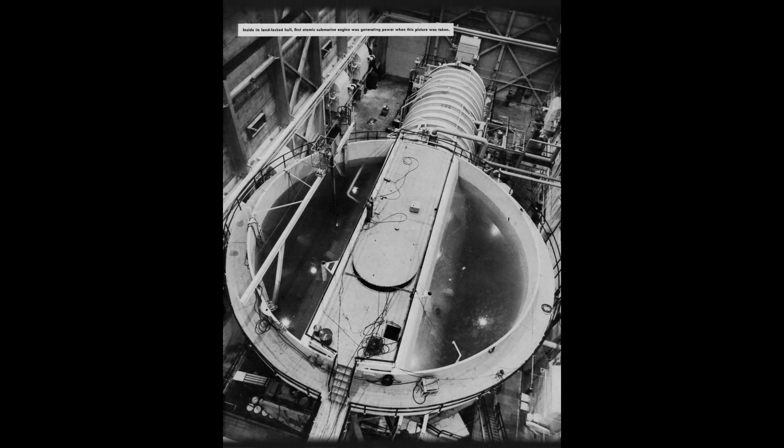The 1950s and early 60s were a time of supreme technological faith. The United States had unlocked the power of the atom. We were building rockets to go to the moon. We were curing diseases. There was a pervasive belief that American engineering could conquer any obstacle, whether it was the vacuum of space or the crushing pressure of the deep.

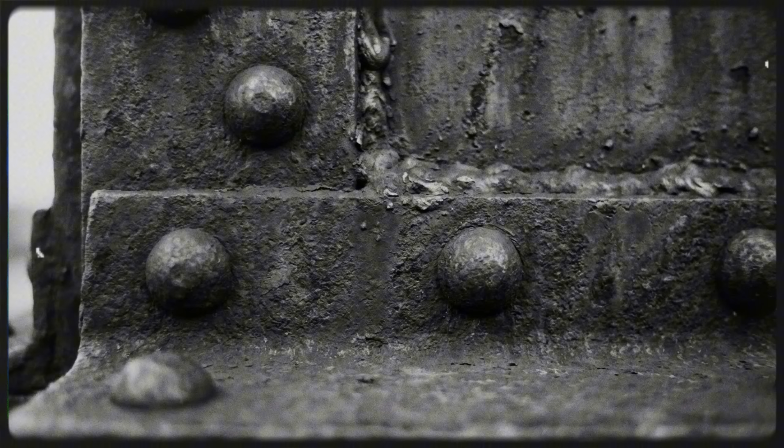In 1954, the Navy launched the USS Nautilus, the world's first nuclear-powered submarine. Before Nautilus, submarines were essentially surface ships that could dip underwater for brief periods. They ran on diesel engines and had to surface to recharge their batteries. They were tethered to the air. Nuclear power cut that tether. A nuclear reactor needs no air to operate. A piece of uranium the size of a golf ball could drive a submarine around the world 3 times without stopping. It changed the fundamental nature of naval warfare.

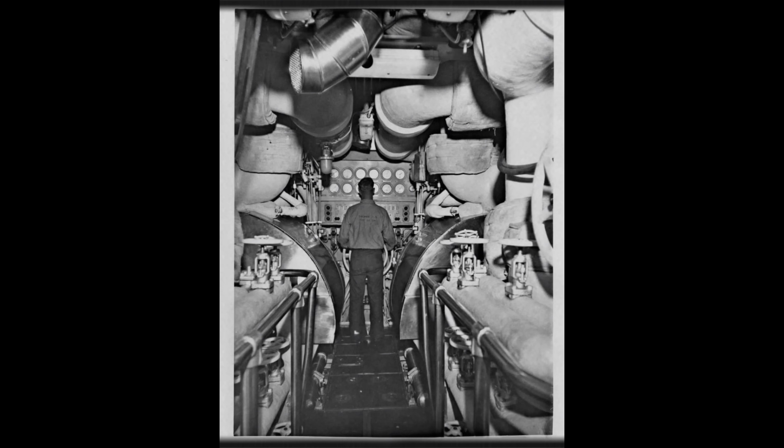Suddenly, the submarine was a true creature of the deep, capable of staying submerged for months. The Navy, led by the brilliant and demanding Admiral Hyman G. Rickover, embraced this new power with religious fervor. They built a fleet of nuclear attack submarines designed to hunt Soviet vessels and protect American carrier groups. The Thresher was the pinnacle of this evolution. She was the first of a new class, designed not just to be fast, but to be quiet and deep.

The engineers gave her a hull made of HY80 steel. This was a new alloy, high-yield 80, capable of withstanding 80,000 pounds of pressure per square inch. It was tough, flexible, and incredibly strong. It allowed the Thresher to operate at depths that would have crushed World War II submarines like tin cans. Her test depth was officially classified, but it was known to be in excess of 1,000 feet. She was powered by the S5W reactor, a pressurized water reactor that was a marvel of reliability and density. It provided massive amounts of power in a compact space, driving the ship through the water with silent, deadly efficiency.

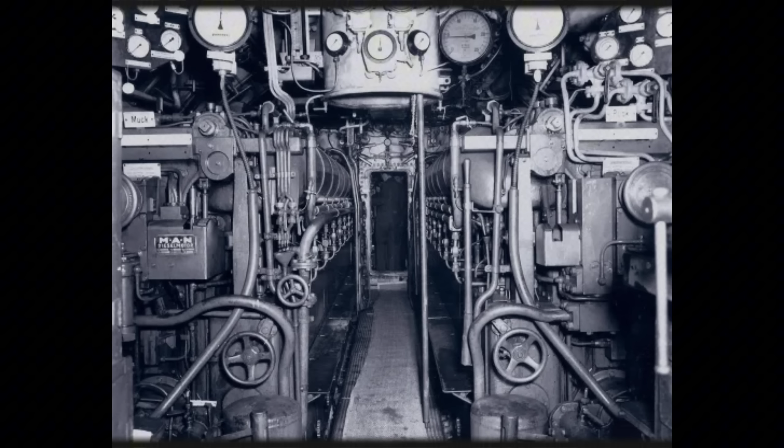The men who designed and built the Thresher believed in her. They believed in the math. They believed in the welding. They believed that they had mastered the physics of the ocean. 'We believed we had built a submarine that could not sink,' a senior naval architect would later testify before a congressional inquiry. This was not arrogance in the traditional sense. It was the confidence of a generation that had won a world war and was busy inventing the future.

The Thresher was more than a machine. She was a statement. She carried the most advanced sonar suite in the world. She carried the newest weapons. She was the Cadillac of the submarine force, the assignment every officer wanted. To be chosen for the Thresher crew meant you were the elite.

When she left the Portsmouth Naval Shipyard for her sea trials that April, there was no fear. The sea trials were seen as a validation, a final check mark on a project that was already considered a triumph. The idea that the hull could fail, or that the reactor could stop, was considered a statistical impossibility. The systems had backups. The backups had backups. The engineering was robust. But faith is a dangerous thing in engineering if it is not paired with verification.

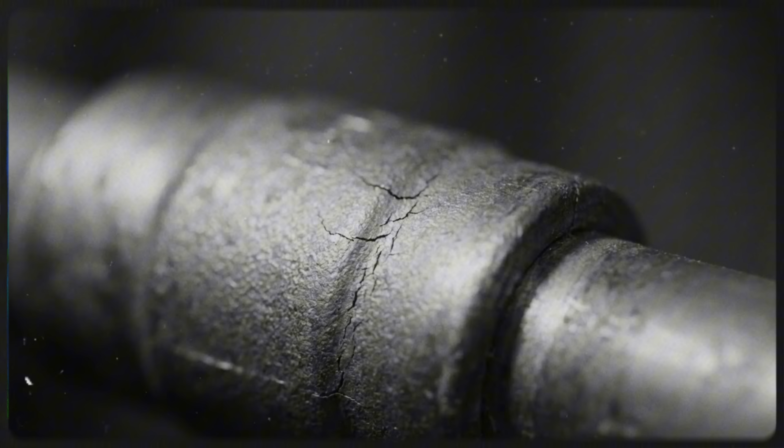The confidence in the Thresher's design masked a series of subtle, quiet dangers. The shift to nuclear power had happened fast, perhaps too fast. The technology of the reactor was light years ahead of the plumbing that supported it.

While the nuclear heart of the ship was built to the most exacting standards imaginable, the rest of the boat, the saltwater pipes, the hydraulic lines, the ballast systems, was built using older, more traditional shipbuilding techniques. It was a spaceship wrapped in the skin of a steamer. Experts and historians who study this era, such as Norman Polmar, often point out this disconnect.

We had placed a 21st century power plant inside a hull built with assumptions from the 1940s. We assumed that because the steel was stronger, the ship was safer. We assumed that because the reactor was perfect, the ship was invincible. As the Thresher pointed her nose down and began her descent into the cold, dark Atlantic, she was carrying more than just her crew.

She was carrying the collective hubris of a nation that thought it had solved the problem of survival at sea. The ocean, however, does not care about national optimism. It does not care about advanced degrees or high-yield steel. It cares only about pressure.

The men on board felt the floor tilt as the submarine dove. They felt the air pressure in the boat change slightly. They watched the depth gauge spin: 400 feet, 600 feet, 800 feet. They were riding the marvel of their age, trusting in the genius of the men who drew the blueprints.

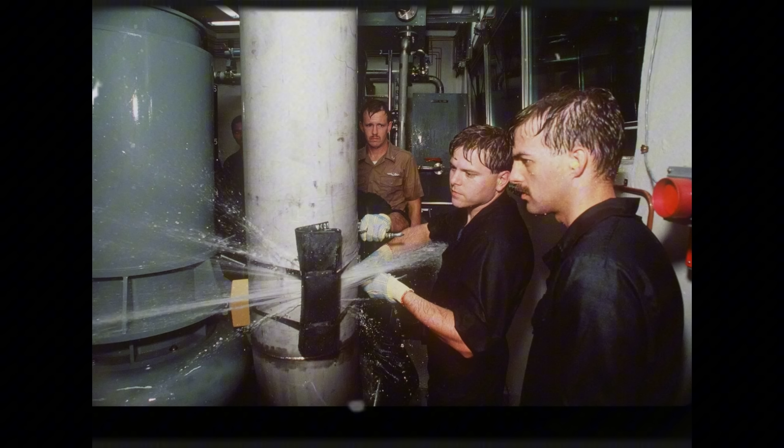The commanding officer, Lieutenant Commander John Wesley Harvey, was the archetype of the nuclear navy. He was young, brilliant, and experienced. He had served on the Nautilus during its historic voyage under the North Pole. He had been handpicked by Admiral Rickover himself. Harvey was a man who knew his boat intimately. He trusted his crew, and they trusted him.

Alongside him were 107 other officers and enlisted men. There were sonar technicians who could distinguish a whale from a Soviet sub at 20 miles. There were reactor operators who knew the physics of neutron flux better than most university professors. There were cooks who were already preparing the midday meal, roast beef and potatoes, in the galley.

And there were the civilians. 17 men from the Portsmouth Naval Shipyard had joined the crew to observe the equipment they had spent months installing. These were men who lived in the local towns, who had families waiting for them back on shore. They were there to check the vibration of a turbine or the seal of a periscope. For them, this was a field trip, a chance to see their handiwork in action.

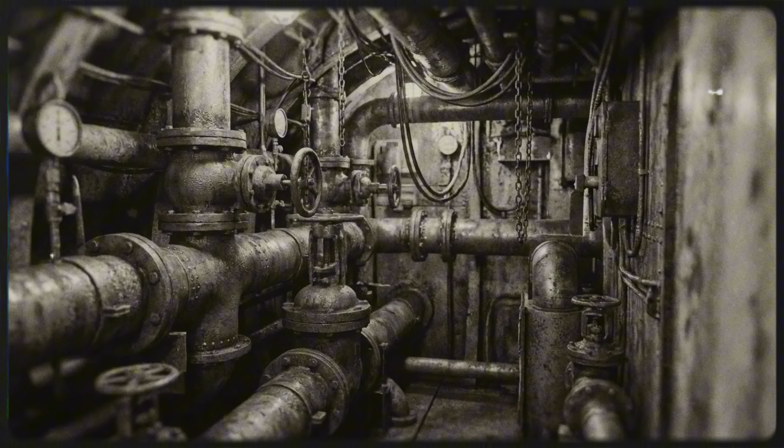At 7:47 a.m., the Thresher reports to the Skylark, proceeding to test depth. The dive begins. A submarine dive is a sensory experience. As the vents open and the ballast tanks fill with water, the boat becomes heavy. The bow angles down. The sensation of motion is smooth, almost like an elevator descending.

Inside the hull, the world is brightly lit and climate-controlled. The fluorescent lights hum. The air smells of coffee, ozone, and amine, the chemical used to scrub carbon dioxide from the atmosphere. It is a sterile, mechanical environment that feels completely detached from the hostile world outside.

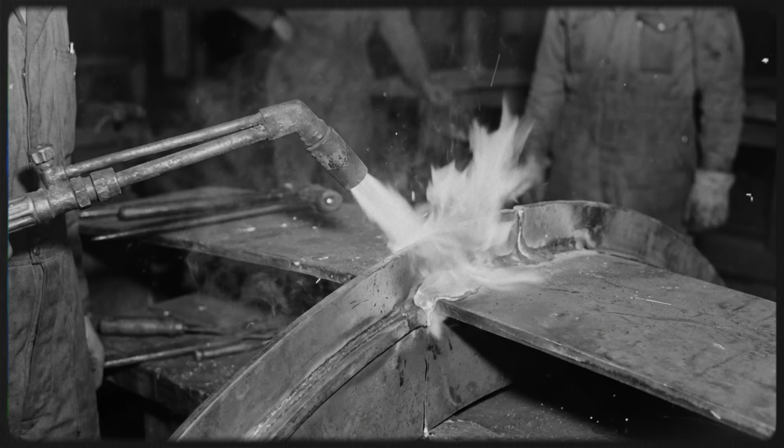But the hull tells a different story. As the Thresher descends past 400 feet, the pressure of the ocean begins to squeeze the steel. The hull literally shrinks. The diameter of the submarine decreases by inches. This compression causes the internal fittings to shift. Floor tiles buckle slightly. Locker doors pop open. The hull groans, a series of loud pops and creaks that echo through the ship as the metal adjusts to the immense weight of the water.

To a rookie, these sounds are terrifying. To a veteran submariner, they are the music of the deep. They are reassuring. They mean the steel is doing its job. At 8:35 a.m., the Thresher passes 400 feet.

The crew is at battle stations, not because they are fighting an enemy, but because the deep ocean is an enemy that never sleeps. Every man is at his post. Damage control parties are standing by with heavy wooden wedges and mauls, ready to plug any leak.

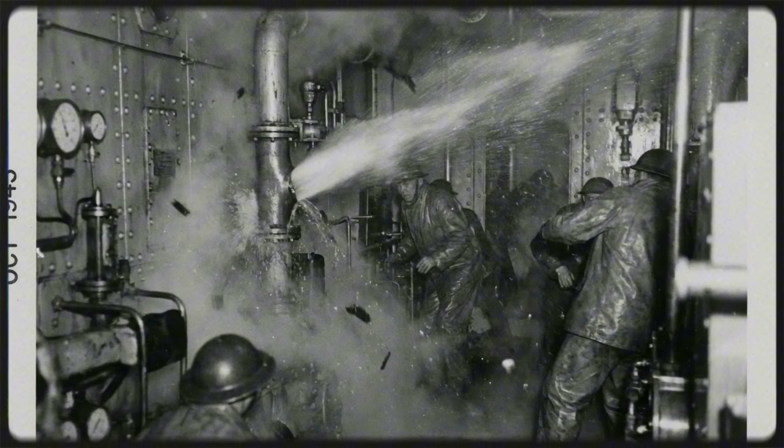At 8:53 a.m., the Thresher passes the 1,000-foot mark. They are now deeper than sunlight can reach. Outside the hull, it is eternal night. The water temperature is near freezing. The pressure is over 440 pounds per square inch.

Captain Harvey orders the boat to level off. They check for leaks. They cycle the rudder. They test the propulsion. Everything is nominal. The reactor is purring. The boat is dry. The mood in the control room is calm. Conditions normal, the officer of the deck notes in the log.

They are approaching the limit, the classified test depth. This is the moment the engineers have been waiting for. This is where the Thresher proves she is the queen of the deep.

But somewhere in the aft section of the ship, in the tangled machinery of the engine room, a microscopic drama is unfolding. The Thresher is a complex organism. She relies on thousands of feet of piping to move seawater through the ship. This water is used for cooling the condensers, for cooling the reactor support systems, and for trim and ballast.

At deep depths, this seawater is not a gentle liquid. It is a high-pressure jet, possessed of incredible kinetic energy. The pipes carrying this water range in size from massive mains to small auxiliary lines.

They are joined together not by welding, which fuses the metal, but by brazing. Silver brazing is a process similar to soldering, where a silver alloy is melted into the joint between two pipes to seal them. It is an elegant, efficient method, but it relies on perfection. If the pipes are not perfectly clean, or if the heat was not applied evenly during construction, the silver does not bond correctly. It leaves tiny voids, air pockets, inside the joint.

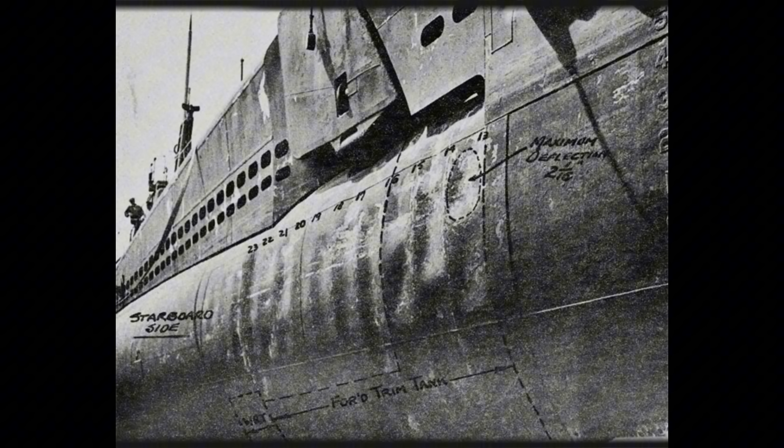In the control room, Captain Harvey feels the boat shudder. He sees the speed indicator drop to 0. He receives the report from the engine room. Flooding, reactor scram. He knows instantly that they are in mortal danger.

He has only one option left. He must make the ship lighter. He must blow the main ballast tanks. Blow main ballast, he orders. The chief of the watch hits the switches.

High-pressure air, stored in massive bottles at 4,000 psi, rushes into the ballast tanks. The goal is to displace the water, to replace the heavy seawater with buoyant air. On the surface, the men on the Skylark hear the hiss of air rushing into the tanks over the underwater telephone. It is the sound of hope. But then, the sound stops.

The air system on the Thresher has a fatal flaw. As the high-pressure air expands rapidly through the valves and strainers, it cools down. This is the Joule-Thomson effect. The air gets so cold, so fast, that the moisture in the air freezes instantly. Ice forms in the strainers. Ice forms in the valves. Within seconds, the pipes are clogged with ice. The flow of air is choked off. The blow fails. The Thresher is now heavy, powerless, and unable to make herself light.

She is falling. Captain Harvey watches the depth gauge. 1,000 feet, 1,100. The needle is moving steadily into the red zone. He grabs the microphone for the underwater telephone. He tries to communicate with the surface, to tell them what is happening, perhaps to leave a final record for the investigators who will come later.

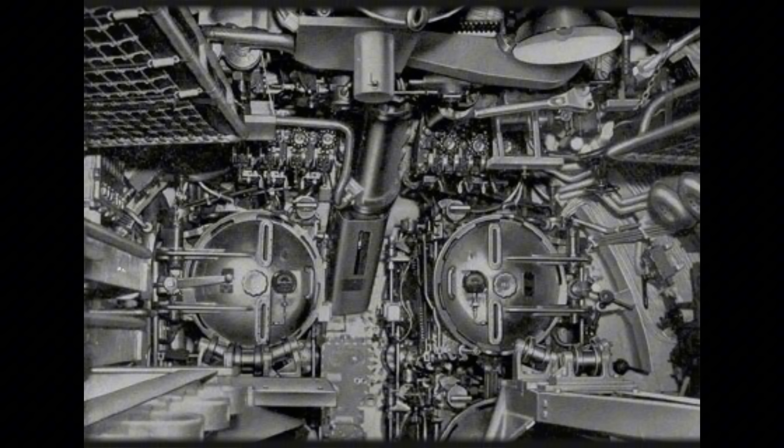"Experiencing minor difficulty," he says, his voice disciplined, refusing to panic even as the floor tilts beneath him. "Attempting to blow." He knows the blow has failed. He is trying again, cycling the valves, hoping the ice will clear. But the physics are relentless.

The Thresher passes her test depth. She passes the safety margin. She enters the crush depth, the theoretical limit where the steel hull can no longer withstand the pressure of the ocean. The hull begins to groan louder now. The metal is crying out. The ribs of the ship are bending. The bulkheads are flexing. The men in the control room stand at their posts.

There is nowhere to run. There is no escape pod. There is only the ship and the sea. They look at each other. They think of their wives in Portsmouth, their children in Groton. They think of the sunlight they left 2 hours ago.

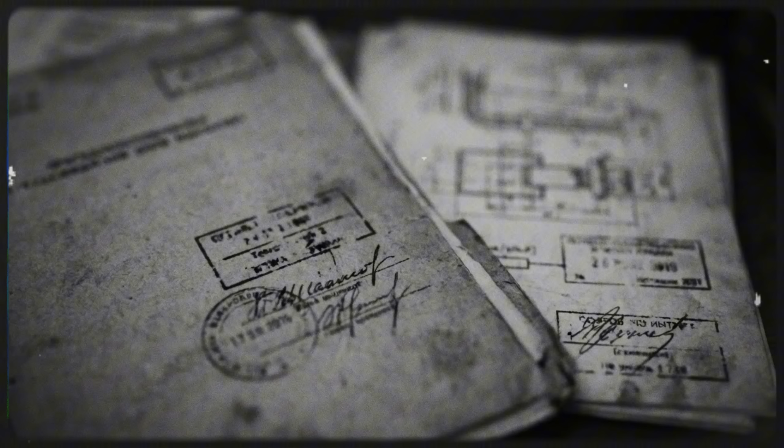At 9:17 a.m., the hull of the USS Thresher reaches its ultimate limit. The ocean finds the weakest point. It pushes in. The collapse is instantaneous. It is faster than the speed of sound. The pressure hull implodes, smashing inward with the violence of a bomb. The air inside the ship is compressed in a microsecond, creating a flash of heat as hot as the surface of the sun.

The 129 men do not suffer. Their brains do not have time to register the pain. One moment, they are standing in a steel room, fighting to save their ship. The next moment, the ocean has reclaimed the space. The Thresher is gone. The pride of the nuclear navy, the machine that was supposed to be unsinkable, has been reduced to thousands of shards of twisted metal, drifting slowly down to the bottom of the Atlantic, 8,400 feet below.

On the surface, the Skylark rocks gently in the swell. The captain lowers his binoculars. The sonar operator takes off his headphones, his face pale. The silence on the radio is absolute. The test is over. The mourning is about to begin.

When a disaster of this magnitude occurs, the first instinct is to blame the unknown. We want to believe it was a rogue wave, a Soviet torpedo, or a mysterious underwater anomaly. It is comforting to think that the cause was external, something beyond our control. But the truth of the Thresher disaster is far more unsettling. The submarine was destroyed not by a monster in the deep, but by a microscopic flaw in our own engineering philosophy. To understand how the most advanced vessel in the world was lost, we must look away from the dramatic implosion and focus on a small, unassuming connection between two pipes. We must understand the physics of the silver-brazed joint.

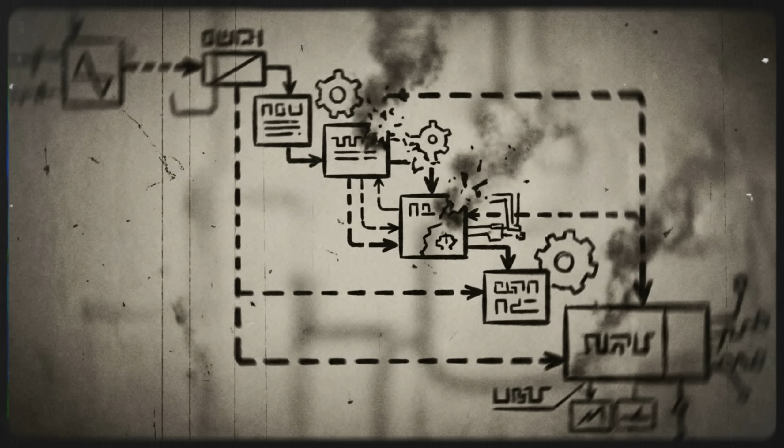A nuclear submarine is essentially a complex plumbing project wrapped in steel. There are miles of pipes running through the hull. Some carry hydraulic fluid to move the rudder. Some carry high-pressure air. But the most critical pipes carry seawater. The ocean is the lifeblood of the submarine. It is used to cool the steam condensers, allowing the reactor to generate power. It is used to cool the auxiliary machinery. This means that the submarine must deliberately bring the ocean inside its hull. The pressure inside these seawater pipes is exactly the same as the pressure outside the submarine. At test depth, that pressure is immense, enough to cut through bone.

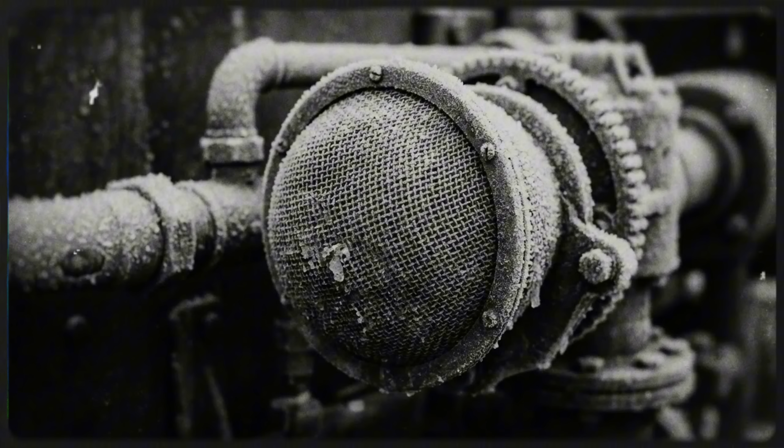In 1963, the standard method for joining these pipes was silver brazing. It is a process that sits somewhere between soldering and welding. You take two pipes, a male end and a female end, and fit them together.

You insert a ring of silver alloy, then heat the joint with a torch until the silver melts and flows into the tiny gap between the pipes by capillary action. When it cools, it forms a solid, watertight seal.

On paper, silver brazing is an excellent technique. It is strong, vibration-resistant, and relatively easy to perform. But in practice, it is unforgiving.

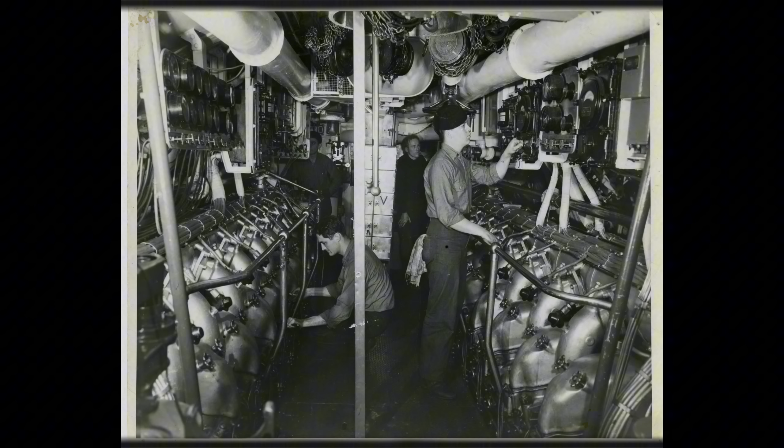For the silver to bond correctly, the metal surfaces must be perfectly clean. If there is a speck of grease, a fingerprint, or a patch of oxidation, the silver will not stick. It will flow around the dirt, leaving a void, an air pocket inside the joint.

Crucially, you cannot see these voids from the outside. A brazed joint can look perfect to the naked eye, smooth, shiny, and solid, while hiding a fatal weakness deep inside the metal. The Thresher had over 3,000 of these silver brazed joints in her seawater systems.

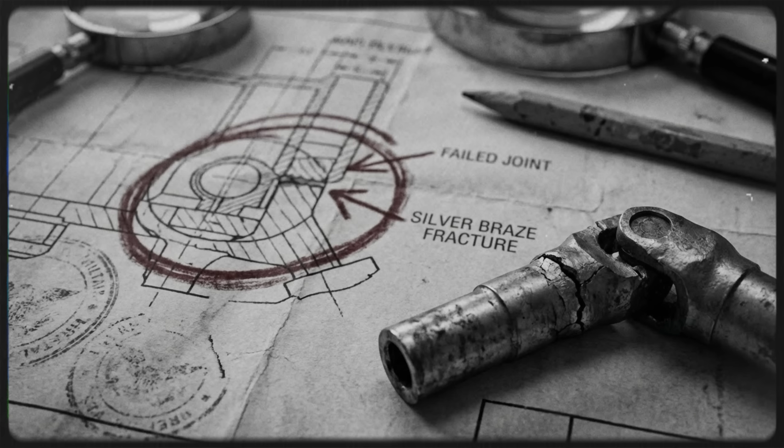During her construction and overhaul, inspections revealed a disturbing trend. Ultrasonic testing, using sound waves to see inside the metal, showed that a significant percentage of the joints were substandard. Some had voids, some had incomplete bonding.

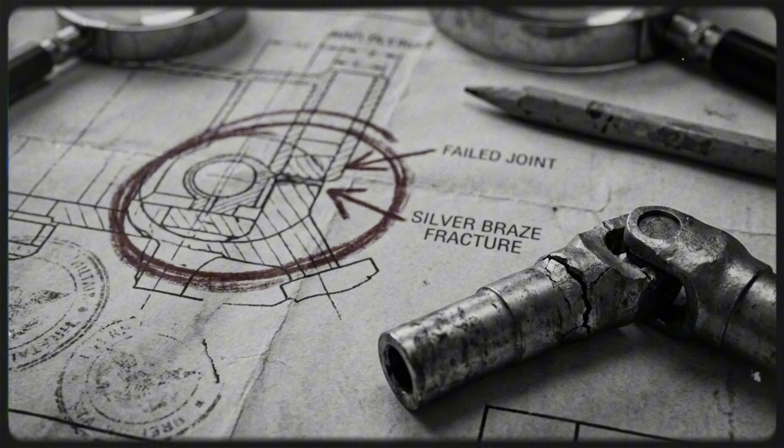But here is where the tragedy moves from mechanics to culture. The Navy faced a dilemma. To fix every suspicious joint would require ripping the ship apart. It would delay the schedule by months, it would cost millions. The decision was made based on probability.

They reasoned that the joints had passed a hydrostatic pressure test in the shipyard. They had held up under pressure once, so they would hold up again. The testing requirement was waived for hundreds of joints.

The Thresher was sent to sea with known potential flaws, under the assumption that the safety factor in the design would cover the imperfections. It was a gamble. And on the morning of April 10, 1963, the House won.

We can reconstruct the failure with terrifying precision. As the Thresher descended, the hull compressed. The steel ribs of the ship flexed. The piping systems, rigidly attached to the hull, were subjected to twisting and bending forces.

Deep in the engine room, one of those substandard silver joints, perhaps a 2-inch line feeding an auxiliary cooling pump, began to stress. The tiny voids inside the silver acted as stress concentrators. Cracks formed. The silver ligament holding the pipes together snapped. The pipe separated. At that depth, the water pressure was roughly 450 pounds per square inch.

When the pipe broke, it didn't just leak. A solid column of water, as hard as a steel bar, blasted into the compartment.

The chaos that followed was dictated by the layout of the engine room. The Thresher's design was dense. The electrical switchboards were located dangerously close to the seawater piping. It was a design oversight that seems obvious in hindsight, but was standard practice at the time.

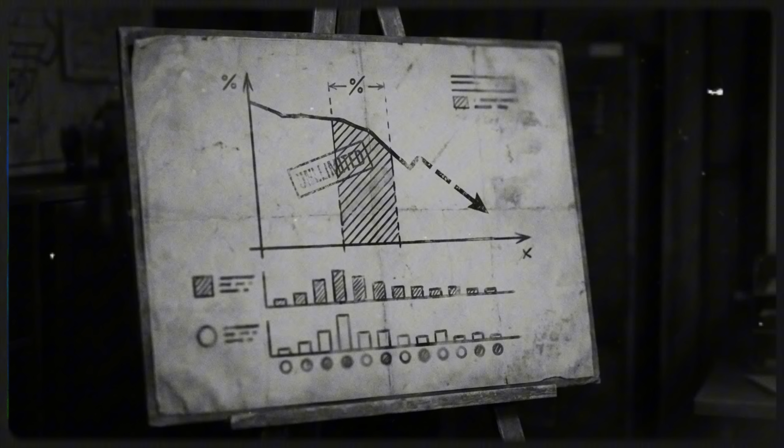When the reactor scrams, the steam generation stops. The turbines spin down. The propeller stops turning. The Thresher was now a glider without an engine.

Normally, this is a survivable emergency. The crew trains for it: reactor scram, rig for reduced electrical. You use the battery to power a small emergency propulsion motor. You drive the ship to the surface.

But the Thresher was deep. She was heavy with flooding, and the battery propulsion system was weak, designed for creeping, not for driving a heavy, sinking boat upward against the crushing weight of the ocean.

There was only one way out: buoyancy. The emergency main ballast blow system is the submarine's parachute. It relies on banks of high-pressure air bottles. When the valves open, this air rushes into the ballast tanks, displacing the water and making the ship light enough to float like a cork.

But the Thresher's air system had a fatal design flaw, one that had never been fully appreciated until this moment. The air was stored at 4,500 psi. To enter the ballast tanks, it had to pass through a complex path of pipes, valves, and strainers, filters. As high-pressure air expands rapidly, it cools down.

This is basic thermodynamics. The air in the Thresher's tanks was not perfectly dry. It contained trace amounts of moisture. When the desperate crew in the control room threw the switches to blow the tanks, the air rushed out.

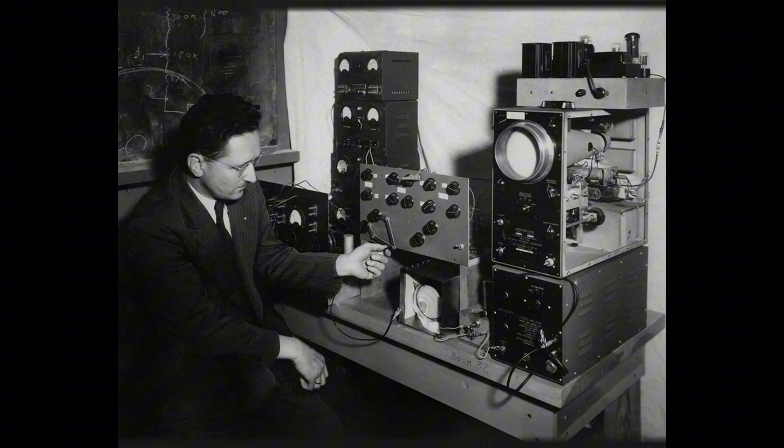The parachute failed to open. The crew of the Thresher was trapped in a deadly cascade of failures.

The bad weld caused the leak. The leak caused the electrical short. The short caused the reactor scram. The scram killed the propulsion, and the ice killed the recovery system.

It was a perfect storm of engineering oversights. Each individual system had been designed by brilliant men. The reactor was safe. The hull was strong. The air system was powerful. But no one had stepped back to look at how these systems interacted in a worst-case scenario.

No one had asked, what happens if a pipe bursts next to the switchboard? No one had asked, what happens if we blow the tanks for more than 30 seconds? The investigation would later call this a lack of system integration.

But in the engine room of the Thresher, as the water level rose and the lights died, it wasn't an academic problem. It was a death sentence.

The men in the engine room fought to the end. Forensic analysis suggests they tried to mechanically isolate the leak. They tried to restart the reactor. But the laws of physics imposed a time limit they could not beat.

The Thresher was sinking at a steep angle. She was sliding backward. As she passed the crush depth, the hull simply ran out of strength. The implosion that followed was a mercy in a grim sense. It was faster than the nervous system could register.

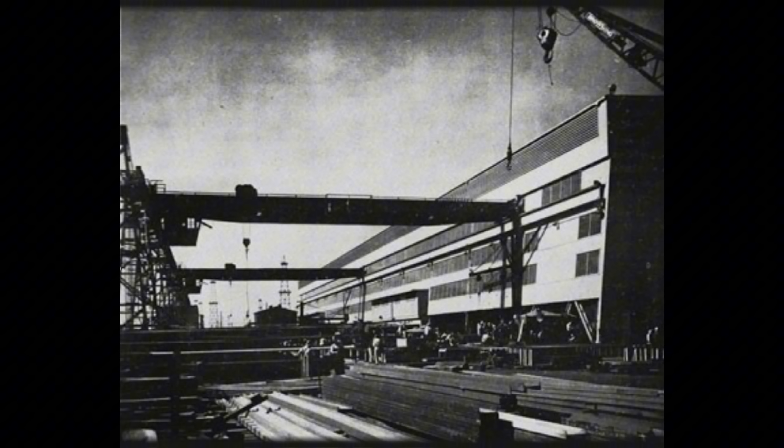Admiral Rickover, the father of the nuclear navy, was called to testify. Shipyard commanders, engineers, and quality control inspectors were put under oath. The question they faced was simple. How could the most advanced ship in history simply vanish?

The answer that emerged was not a technical smoking gun. It wasn't a single broken part that doomed the Thresher. It was something far more disturbing. It was a failure of philosophy.

The investigation revealed that the culture of submarine construction had not kept pace with the technology of submarine operation. The Navy was building nuclear spaceships with the mindset of a World War II diesel mechanic.

The most terrifying truth was that the disaster was not an accident in the traditional sense. It was the inevitable mathematical result of a system built on assumptions.

The investigators found that the quality control records for the Thresher were a disaster. During the construction of the submarine, thousands of welds and braze joints were made. Each one was supposed to be inspected and signed off.

But when the investigators pulled the files, they found gaps. Signatures were missing. Ultrasonic test results were incomplete. In one chilling exchange, it was revealed that nearly 14% of the silver braze joints that were tested showed defects.

Instead of repairing them all, a waiver was issued. The logic was circular. The ship has operated safely so far, therefore the joints must be safe. This is known as the normalization of deviance.

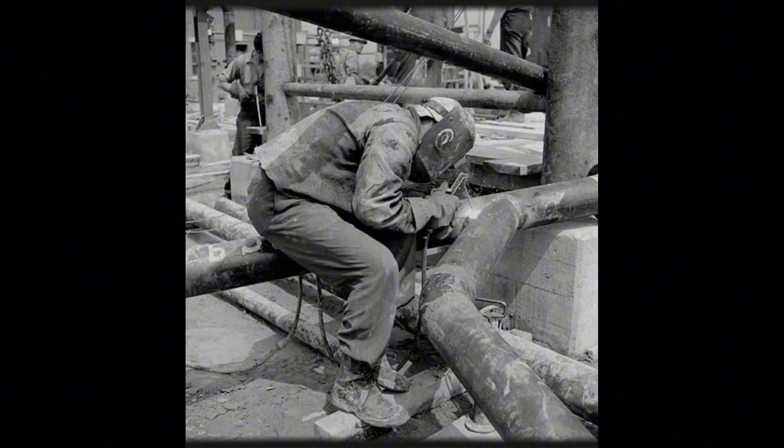The investigation also changed the way the Navy thought about depth. Before Thresher, the test depth was a target to be hit. After Thresher, it was treated as a boundary that must be respected. The operating depths of existing submarines were restricted. Some boats were never allowed to dive deep again because their hulls could not be retroactively certified.

The inquiry was a public confession of failure. It admitted that the United States Navy, the most powerful maritime force in history, had been careless. It had let arrogance replace rigor. But out of this humiliating admission came a resolve that is unique in military history. Usually, after a war or a disaster, organizations tend to cover up their mistakes. They classify the reports. They protect the careers of the admirals.

The Navy did the opposite. They took the lessons of the Thresher and codified them into a program that would become the gold standard for high-risk engineering. They decided that the only way to honor the dead was to ensure that the specific chain of failures that killed them could never, ever happen again.

The Thresher disaster proved that in the nuclear age, good enough is a death sentence. It proved that complex systems fail in complex ways. And it proved that the only defense against the chaos of the ocean is a fanatical, almost religious devotion to detail. As the findings of the court were released to the grieving families and the shocked public, the message was clear: we broke faith with these men.

We sent them out in a machine that was not worthy of them, and we will spend the rest of our existence trying to earn that trust back.

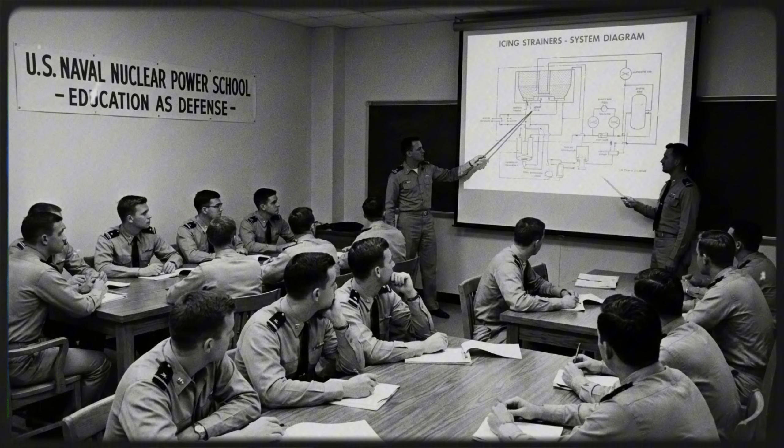The program also banned silver brazing on all piping systems greater than a certain diameter. It was replaced with welding, a more difficult, expensive process, but one that creates a monolithic bond that can be easily inspected by X-ray.

Recoverability means that even if something fails, the ship must be able to save itself. The Thresher died because she couldn't blow her ballast tanks fast enough. SubSafe mandated a complete redesign of the emergency blow system. The new system was designed to be idiot-proof and physics-proof.

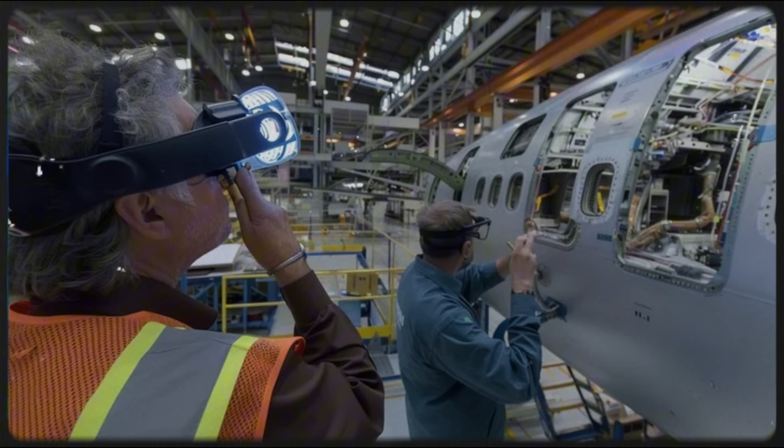The air passages were widened. The strainers were redesigned to prevent icing. The valves were built to snap open instantly. Today, when a modern submarine triggers an emergency blow, it doesn't just hiss, it explodes upward. The ship rockets to the surface with such violence that it can breach out of the water like a whale. It is a ride designed to be terrifying, because the alternative is death.

But programs are just paper. The real test of SubSafe came 5 years later, in 1968, with another tragedy that served as a grim validation of the new rules. The USS Scorpion, SSN 589, was a skipjack-class submarine. She was an older boat, built before the Thresher disaster. She was fast and aggressive, but she was tired.

In the late 1960s, the Navy was stretched thin by the Cold War and the Vietnam conflict. The operational tempo was brutal. Submarines were needed everywhere. The Scorpion was due for a massive overhaul to bring her up to the new SubSafe standards. It would have been expensive and time-consuming. So, the Navy made a calculated risk. They gave her a restricted availability, a quick tune-up instead of a full rebuild.

They did not certify her as SubSafe. Instead, they placed restrictions on her. She was told not to dive to her original test depth. She was told to be careful.

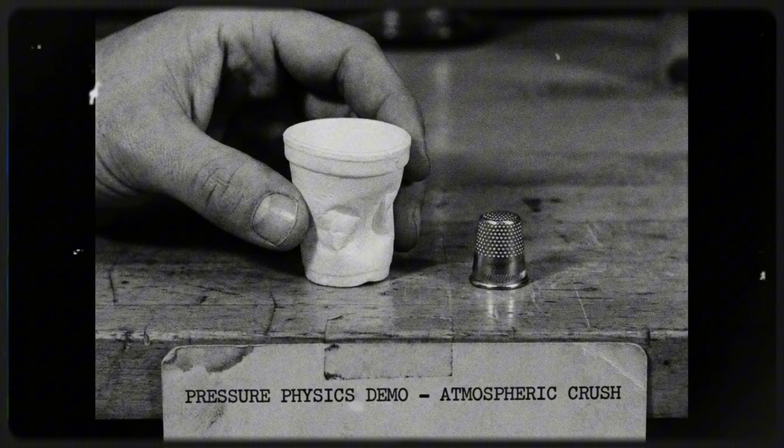There is a famous story in the submarine force about the SUBSAFE audit. Every year, independent teams descend on the submarine bases to audit the records. They pick a random valve on a random ship and ask, "Prove to me this is safe." The crew must produce the documentation, showing the paper trail that links that specific piece of metal back to the factory. If they can't, the submarine is decertified. It cannot dive. It is chained to the pier until the issue is resolved.

This culture of chronic uneasiness is what keeps the fleet alive. Submariners are taught to never be comfortable. They are taught that the ocean is always trying to kill them, and the only shield they have is the integrity of the ship. The SUBSAFE program also changed the way the Navy handles communication.

During the Thresher incident, the ambiguity of the phrase "minor difficulty" caused confusion. Today, communications are precise and standardized. There is no room for politeness in an emergency.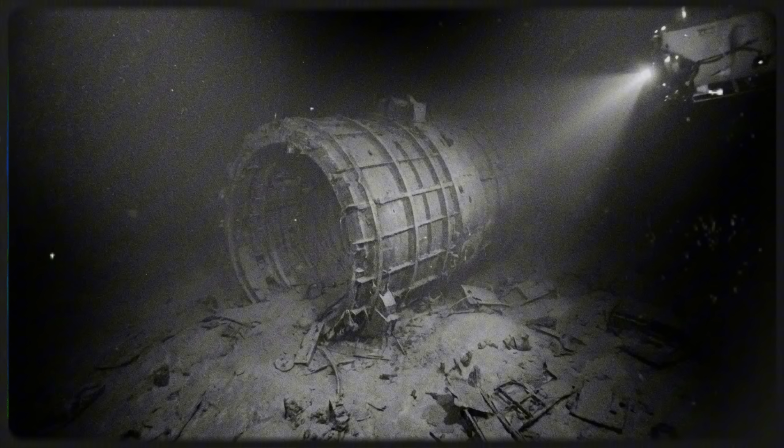But perhaps the most profound change is in the concept of responsibility. Before Thresher, safety was seen as the job of the safety officer. After Thresher, safety became the personal responsibility of every single person who touches the boat. The welder knows that his weld is the only thing standing between the crew and the abyss. The supply clerk knows that if he orders the wrong bolt, the hull could fail. The profound weight of the 129 ghosts rests on the shoulders of the entire industrial base.

It is a heavy burden, but it is carried with pride. The modern U.S. submarine force is the safest in the world, not because they have better technology, though they do, but because they have better memory. They remember the sound of the implosion. They remember the silence on the Skylark.

The Scorpion tragedy, while devastating, underscored that the decision to implement SUBSAFE was correct. It was the line in the sand. The Navy decided that the cost of the program, the billions of dollars, the delays, the endless inspections, was worth it. Because the alternative is the sound of a hull crushing at depth.

The legacy of the Thresher is not found in a museum or a monument. It is found in the fact that thousands of submariners have deployed, done their duty, and returned home to their families. Every reunion, every retirement ceremony, every grandchild born to a submarine sailor is a direct result of the lessons learned in the dark waters of 1963.

The price of safety was 129 lives. It was an agonizingly high price to pay, but the Navy ensured that it was a price that only had to be paid once.

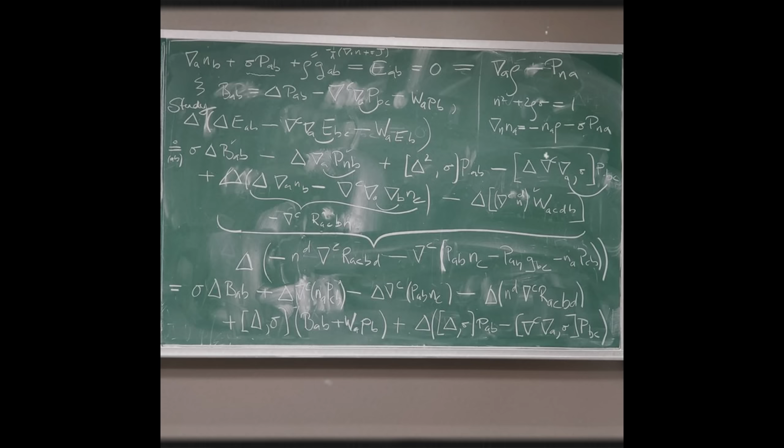8,400 feet below the surface of the North Atlantic, the darkness is absolute. The water pressure is 3,800 pounds per square inch, enough to compress a styrofoam cup to the size of a thimble. Here, scattered across a wide field of silt and gray mud, lies the physical reality of the USS Thresher.

The debris field has been visited many times by robotic explorers and deep submergence vehicles like the Alvin and the Jason. The images they bring back are surreal. The massive sail, the dorsal fin of the submarine, stands upright on the bottom, its number 593 still visible, ghostly white against the black steel.

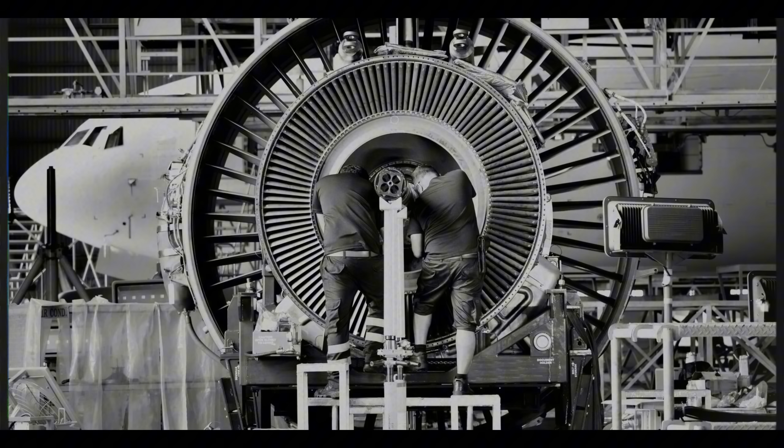There are sections of the hull, twisted and torn like paper. There are tangles of cable and pipe. But what strikes the observers most is not the violence of the wreckage, but the silence. It is a tomb. The reactor compartment remains intact, a silent sentinel guarding the nuclear fuel that still sits inside, warm with residual radiation, but contained by the heavy shielding.

The Navy monitors the site regularly to ensure no radiation leaks into the environment. So far, the engineering has held. Even in death, the Thresher's reactor protects the ocean. This gravesite is a restricted area. No fishing is allowed. No salvage is permitted. It is holy ground for the submarine force.

But the true monument to the Thresher is not down there in the cold dark. It is up here, in the light, moving silently through the oceans of the world.

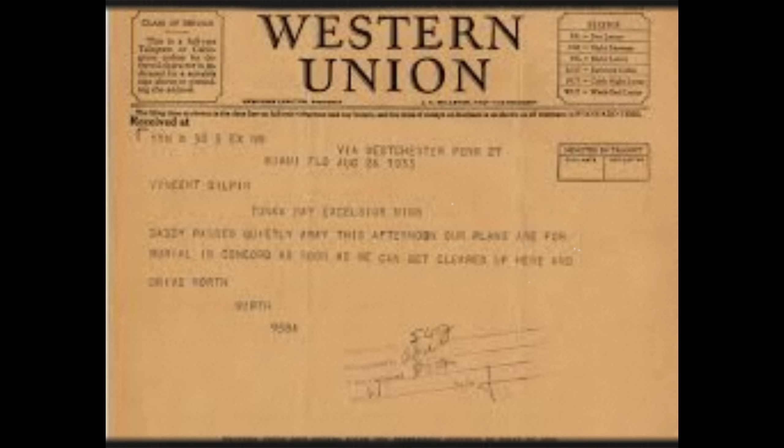The legacy of the Thresher lives in the institutional memory of the United States Navy. Institutional memory is a fragile thing. In most organizations, lessons are learned and then forgotten as the generation that learned them retires. The people who saw the fire die, and the new people only read about it in books. They start to think the rules are old-fashioned. They start to cut corners again. The submarine force fights this forgetting with a ferocity that borders on obsession.

Every year, on the anniversary of the loss, ceremonies are held at submarine bases across the country. The names of the 129 men are read aloud. A bell is tolled for each soul. But it goes deeper than ceremonies. The story of the Thresher is woven into the training of every new sailor.

When a young officer arrives at nuclear power school, one of the first things he studies is the Thresher accident. He doesn't just learn that it sank, he learns why. He studies the thermodynamics of the icing strainers. He studies the metallurgy of the silver brazing. He is taught that the laws of physics are unforgiving and that the ocean is always waiting for a mistake.

This education creates a unique psychological profile. A submariner is trained to be a pessimist. He is trained to look at a valve and ask, how will this fail? He is trained to trust his shipmates but verify their work. This is the concept of verifiable trust. It is the idea that I can sleep soundly in my bunk, hundreds of feet underwater, because I know that the person on watch is following the procedure. And I know he is following the procedure because the system does not allow him to deviate.

A submariner once explained it simply to a civilian. When I'm 1,000 feet down, I'm trusting people I will never meet. The welder in 1960, the inspector in 1985, the supply clerk in 2005. I am trusting their signatures. Their integrity is the only thing keeping the water out. This chain of trust is the invisible structure that holds the fleet together. It is stronger than the HY-80 steel.